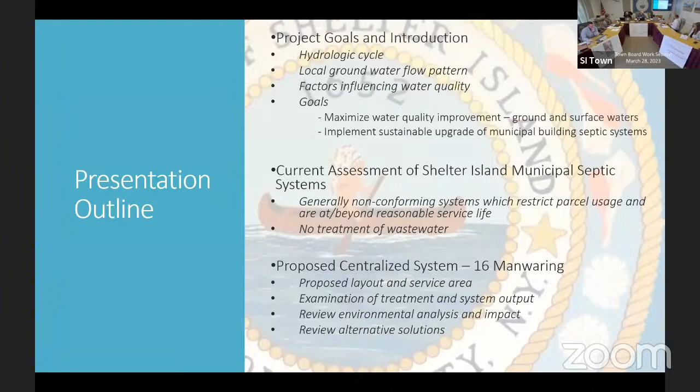Then we'll talk about what's proposed, the 16 Manwaring location, its layout, and the service area, which is largely unchanged. We'll talk about the different treatment types and what's actually coming out of this system. We'll go over the environmental analysis and impact that was done, and dig a bit more into that discussion about alternatives. Next, please.

So just walking this back to high school earth science and a bit of the groundwater hydrologic cycle. What we have in front of us is pretty typical, not of Shelter Island specifically, but just typical to give folks a sense of what happens to water here. You'll see there's a lens, which is the water table below the island surface, where we draw our drinking water from exclusively. Rain comes down as precipitation, percolates through the soil, gets somewhat naturally filtered, and enters the water table. But what's really important here is the arrows at the bottom, showing groundwater flow as it curves out and outward.

So once the fresh water hits the bottom of the freshwater aquifer, it can be met with things like clay layers or impermeable rock. In our case, across most of the island, it's a saltwater aquifer that's below. But at that point, the groundwater flow turns from going straight down and heads outward.

This flow pattern is what we see across the island. The highest portion of the aquifer is generally in the center. We'll talk more about that in a second. The flow pattern of water coming in, eventually making its way out to the surrounding areas, is relevant because the groundwater travels in multiple dimensions. If you are in the center of the island, you have access to groundwater that lingers for the longest amount of time because it takes longer for it to make its way out of the island.

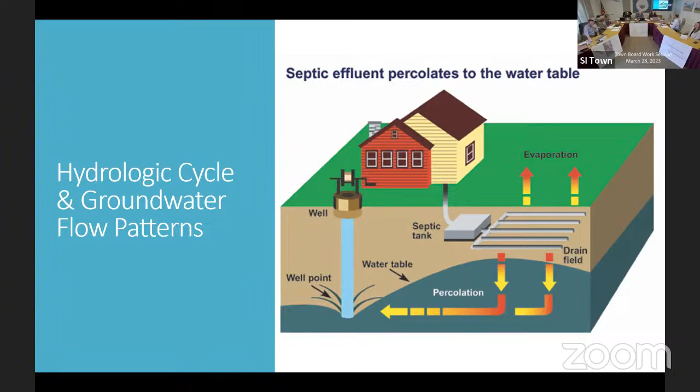Next slide, please. So then we'll talk about why this is actually a problem. The first is that, largely, we have a discussion about nitrogen reduction. Nitrogen has been overwhelmingly the conversation piece over the past few decades, and nitrogen has largely been the primary and most impactful issue facing our community. Nitrogen is a natural

ingredient in sewage. It's also a pretty powerful fertilizer. It happens to be prolific in all sorts of organic material and decay. So it's all over the place, but in our case it lingers in our system because of our wastewater contributions. Other types of communities with different use profiles may have industrial or agricultural sources of nitrogen. In our case today, our nitrogen abundance is overwhelmingly because of wastewater contributions.

There are other things, obviously, in wastewater that are problematic. Nitrogen is a good indicator of what's in your groundwater because it is the lingering impact that doesn't really break down in the groundwater once it enters there.

So if you have high content of nitrogen in your drinking water, it's indicative that your drinking water is influenced by sewage. And there are other issues that come with that. There are viruses, bacteria, different kinds of disease, other contaminants that tend to travel in wastewater. They vary greatly, but nitrogen can be used as an indicator as to how much wastewater is influencing your drinking water supply.

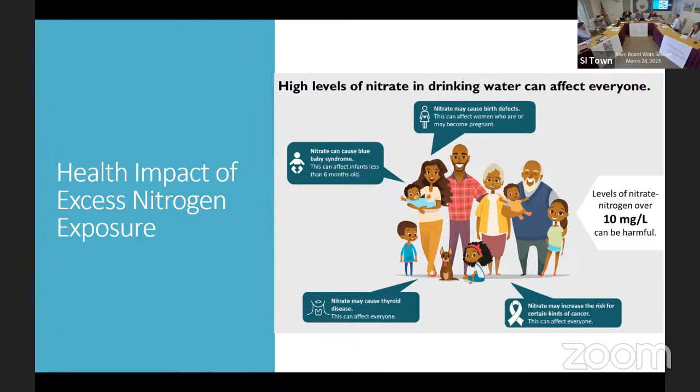Joe, can I just ask a quick question about that? Do you mind if I interrupt? Go ahead. When it's above 10, is there no finer delineation, like 19 or 20, it's just above 10? Well, in this map, yes, but you can take a home test, for instance, and they will tell you to the milligram what it is, whether it's 11 or 13. And we have readings higher than that, you know of? We have readings as high as 50, which would be 5 times over the drinking water standard. And that would be considered heavily influenced, probably approaching maybe half of the drinking water supply influenced by wastewater. But totally unsuitable for use. Cooking, brushing your teeth, drinking, at that level. Okay, thank you.

These are just gradients established by the modeling effort. Greater than 10 got red. So there could be readings in there of 11 or 25, but still be red.

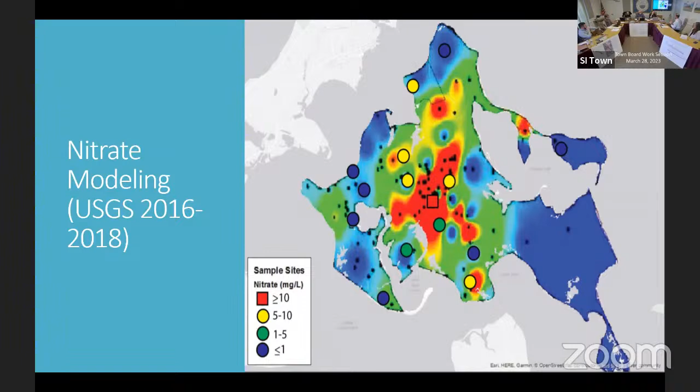You don't have a lot of extra space on the parcels to meet the setback requirements. We'll talk a little bit more about that challenge as we look at the individual system approach as an alternative. But this is largely the trouble with putting in big systems, or even just systems in general, on relatively small parcels — you can't quite make it fit within the regulation. So these were done at a time when these setbacks either weren't in place, pre-1970s, or they had to get a variance for approval to put them in. In some cases, you just don't have a choice — you have a parcel that's smaller, and so you have to put it in. But that's the situation up here.

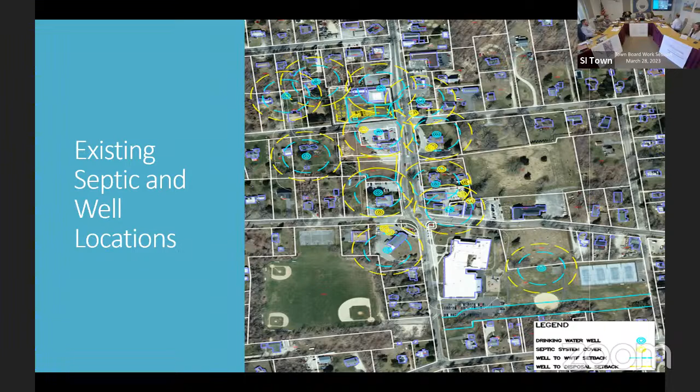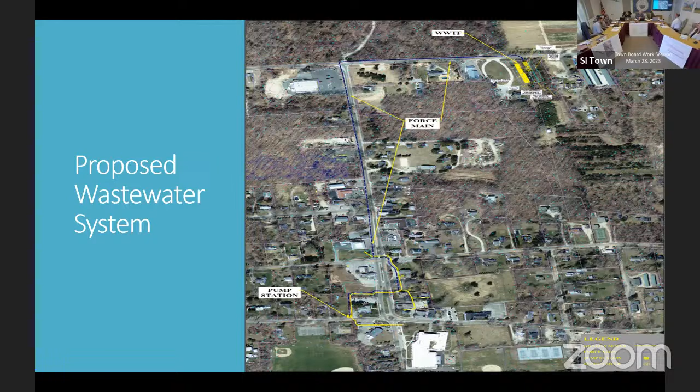And it can be styled more or less any way you like to blend into the character of the neighborhood, or for function. It can be outfitted with solar panels, et cetera. You have total flexibility with that. Really what the project needs is just a square footage, about 20 by 20.

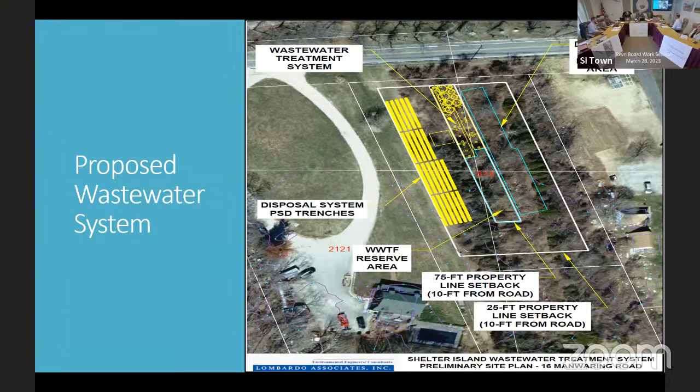So for the environmental impact analysis, which we're actually going to talk about in more detail next week, the specific supplemental environmental review was done by third-party experts on this, PW Grosser. They're going to be presenting their findings more specifically next week. It's going to include a formal final report. But here are bullet points of what was reviewed and evaluated as part of that analysis.

So there's a couple here that obviously require some more work than others — some are subjective, some are very much objective. So this is just a comprehensive list of what's going to be included in that report: discussion about water resources and their impact, alternatives analysis, land use, community character, consistency with land use and community plans, ecological resources, energy resources, construction-related impacts — things like noise, traffic, the nuances of how you pull this project together — and growth-inducing impacts. What long-term impact, if any, will there be?

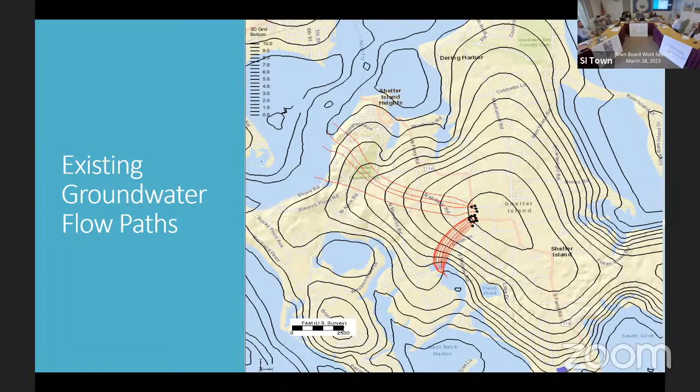So photosynthetic organisms like algae operate just like plants, but in the water. They take that nutrient just like your grass does, and they use it to explode in growth. That abundance of algae of various types is what degrades water quality and becomes out of a natural balance. It has an impact on oxygen levels, and that's the degradation in the saltwater environment we're talking about. So nitrogen not only negatively impacts your drinking water supply, but also has this ability to degrade the saltwater environment as well.

So the next step in the model was, okay, what's the impact of what we're proposing? A big conversation piece was whether we're going to be impacting any other groundwater user in the area. Certainly we don't want that. So we have to do the same kind of flow path modeling for where we're proposing to put this wastewater system in and understand what those impacts are. The red lines are the same flow paths from septic like you saw before.

Sorry to interrupt, but I want to make this clear before you do this analysis: that flow path also represents a lower nitrogen concentration, like 3 milligrams per liter, projected for the municipal plant. That's important, because you could just look at that and say, all right, we're just taking the pollution from here and putting it here, but no. I think the most important distinction is that the red lines don't consider whether it's 100 milligrams per liter or 3. It's simply the path that it travels.

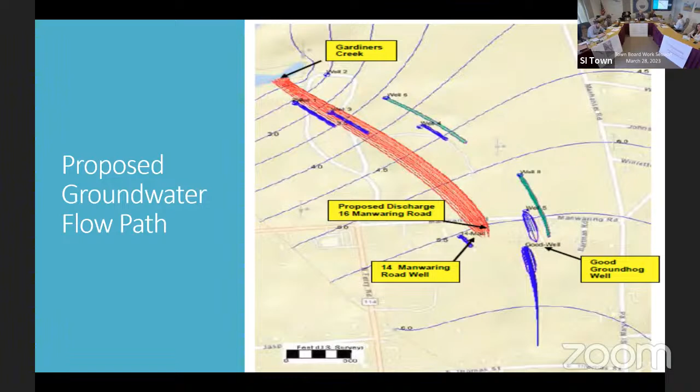Next slide, please. Next slide.

So, okay, just moving past the groundwater flow, we looked at the impact of Gardiners Creek. This is a horrible slide for trying to read anything off of here. It's small numbers, but I only included it here as a conversation piece about how we analyzed impact of Gardiners Creek. So we started with a list of all of the properties that fall within the Gardiners Creek watershed, people who either live in a residential place or commercial place. We took all the data from the assessor's office, any parcel that is within an impact range to Gardiners Creek, and we assessed what activity is going on there.

So you can go to the next slide. It's just another table, but it's the same table that was on the slide before. We looked at the address, we looked at the size of the property, we looked at what buildings were there. We generated their wastewater flow based on the usage. If it was a restaurant, it was a higher flow amount with also a higher concentration. If it was a residential house, we assessed with residential concentrations.

We added that all up to understand the relative impact based on activities going on there, and then reassessed our impact as to how it relates. What are we putting in, the equivalent of 15 homes worth of activity, and how does the health of the creek respond to what's already there?

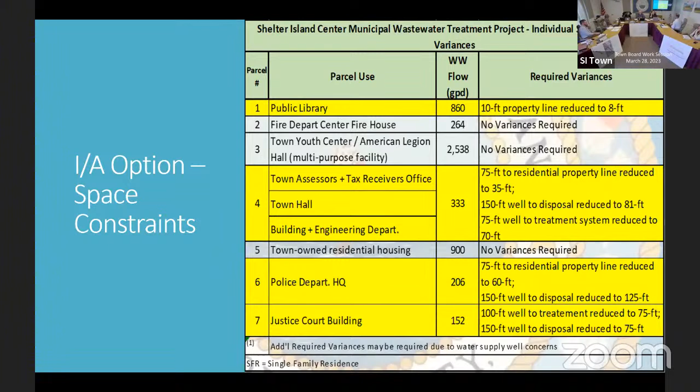Some have looked at this project and said you're paying a large portion of the funds towards pipe, and pipe doesn't treat nitrogen, and that's correct, it's a fair statement. But what the pipe does by centralizing this treatment is give you the opportunity to adapt in the future when the community's needs or regulatory demands require it.

One situation we're seeing play out is that we have individual systems widespread throughout the island. We've been talking about nitrogen problems for decades. Part of the reason it takes so long is because we're changing every single one of those with the latest technology. Likely in a few years, if not a few decades, there'll be another challenge, and we'll have to go through that rendition again to replace every single one of these.

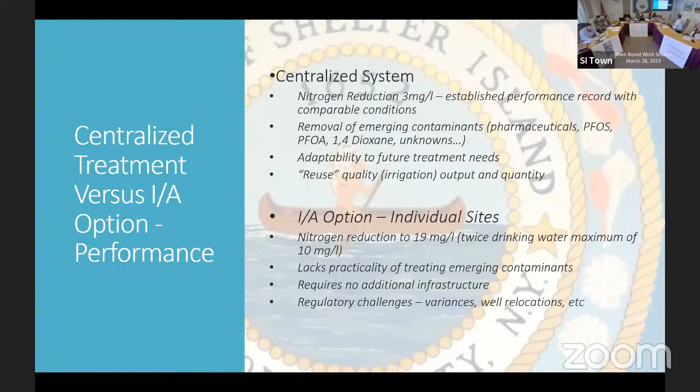Next slide, please. Oh, here's - okay, yeah, thought these are a little bit relevant.

Suffolk Times article back in October in Orient, Water Quality Advisory. This was a PFAS-related issue. So Orient, similar to here, has a very limited public water supply area - they're largely on private wells. And just last year, Suffolk County Health Department had done some testing about PFAS levels, and it turned out that a big portion of the downtown area was exceeding the current PFAS standards. They were working with these property owners to understand the extent of the area, and the state was issuing them bottled drinking water as a substitute. But the reason why I brought this up is because it happened so quickly - for a lot of people there, they just found out overnight that they have this drinking water problem. They had made a lot of investment into IA systems in the area, and this is something that potentially could have happened here.

It's very much unfolding now, and I think it will be an interesting case study for how other similar communities will face drinking water quality problems in terms of water delivery. Are they going to stick with this private model and do filtration at everybody's home, or will they move towards public water systems? Will they move towards wastewater treatment? That's yet to be seen.

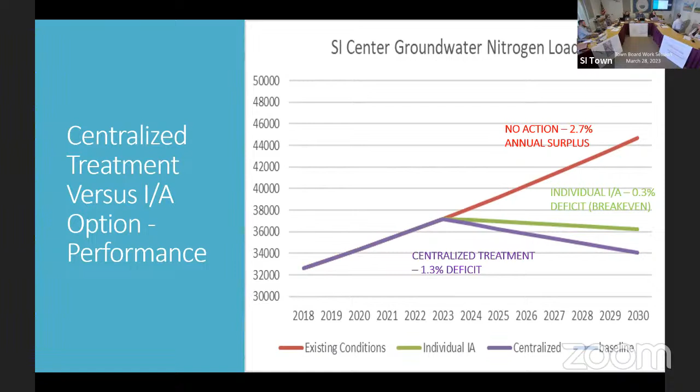So that's the end of my presentation. I think, right? Next slide.

Thanks, Joe. Okay, any questions from the town board before we move on? I think I'm good, sorry about interrupting. Okay, you guys want to take a 2-minute break or keep going? Keep going? Okay, I'm fine. Feel free to interrupt — we have an interrupt list, Christina, anytime. Is there a list or just...?

Christina, I have a question — will this be on the website, what Joe just did? It's a sort of simplified version of what's there, right, in case anybody needs it. Okay, we'll start with people in the audience.

Howard Johansson? Afternoon. Thank you, Joe, I thought that was an excellent presentation.

It told us where we are and where we want to go. I just have a couple of things I'd like to clarify. One is, in the original discussion about Klenawicus Field, it was said that the majority, or predominantly all, of the flow from the center of town was going in that direction to Coecles Harbor. I was wondering how all of a sudden — I'm not familiar with this new modeling that just came out — but we made a 180-degree change. So I just want to know how that modeling was done.

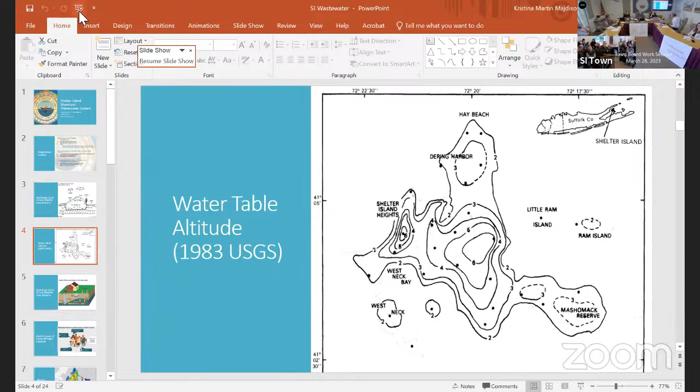Could we pull up the presentation again, Christina, and go to that original groundwater elevation table at the beginning, the white image? So that's a really good question, Howard. Yeah, that's the one. And what I want to point out, Howard, is that being at the center...

Okay, that one's good. So we talked about being at the top of the mountain and how that has the biggest influence. That's your opportunity to go in many different directions. A small turn takes you to the other side. A small turn the opposite way, you're 180 degrees away.

Based off of the groundwater elevations, we were really at that tipping point where you could go to the right towards Coecles Harbor, or towards any of these other directions. And I think the evidence of that is the split that we have now. You see that the school buildings are going towards Menantic Creek, and just a couple hundred feet down, you're going out towards Shelter Island Sound.

When we had the original discussion about Klenawicus, we had said, hey, I actually think what's going on here, you're going a little bit in every direction to all of those different water bodies. And the modeling is showing that it's a little bit less spread out than we thought. It's actually more confined, but still splitting off. We're just favoring that one side of the island than the other. And that's why you do the modeling.

Is that modeling described in the addendum 1 or 2? Yeah, I mean, I see the results in the report. Yep, it's actually how the modeling was done. It was, yes, and it was done by an independent hydrogeologist who specializes in hydrogeologic modeling in the Northeast.

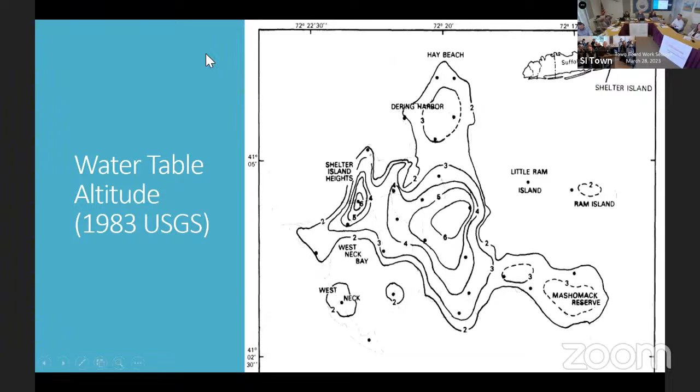Does a lot of work for Cape Cod. His name is Tom Cambareri, and he was contracted separately to take data from the USGS, take the design proposal from us, and to model the impact. So these are actually his findings, not PO's, not my own. All of the modeling effort was done by a third party. And that's what is in those 2 addendums.

Yep, and at the end, actually, of addendum 2 are these black slides here. That was a deliverable from Tom. Yeah, so it's included as an appendix. Just didn't understand how come it was 180 degree completely.

Yeah, so that was the one question. My other question was, have we been given the PBS report from the education department showing the UD engineer's report for the school, which cost $800,000? That system would cost $800,000.

What's PBS? That's the architect. BBS, BB. BBS, yeah, right? Yeah, I mean, they're the big firm I know of. Yeah, that's the one. That would be a question for the school district. We haven't looked at that to see viability of the Fuji system.

Oh, no, certainly. That design's not done yet. That's a decision that they're wavering on whether to commit to doing that work. But we met with that firm when we first kicked off the project to understand what their intentions were, how they were to approach it. One thing that jumped out to us was that that's not a widely established practice.

Fuji doing these school installations, and in fact, Meg could actually probably speak more. But we certainly know that the firm that was proposing this, I think this was their first go around for high concentration at a school. So there were concerns about performance with this type of system as well.